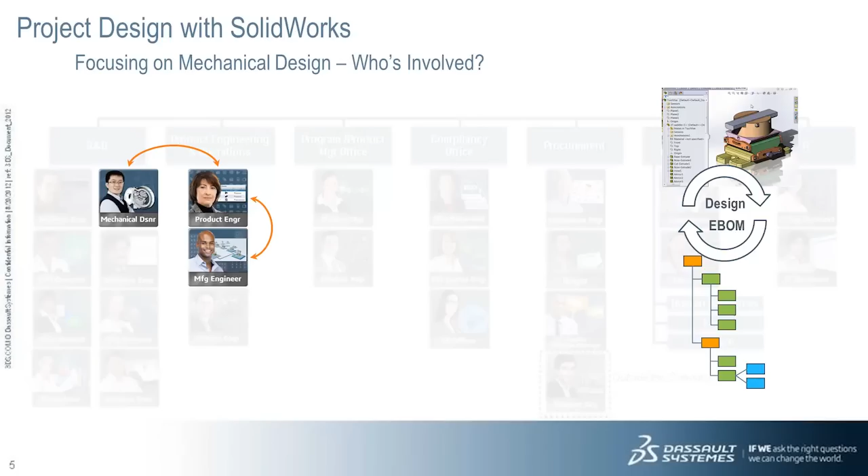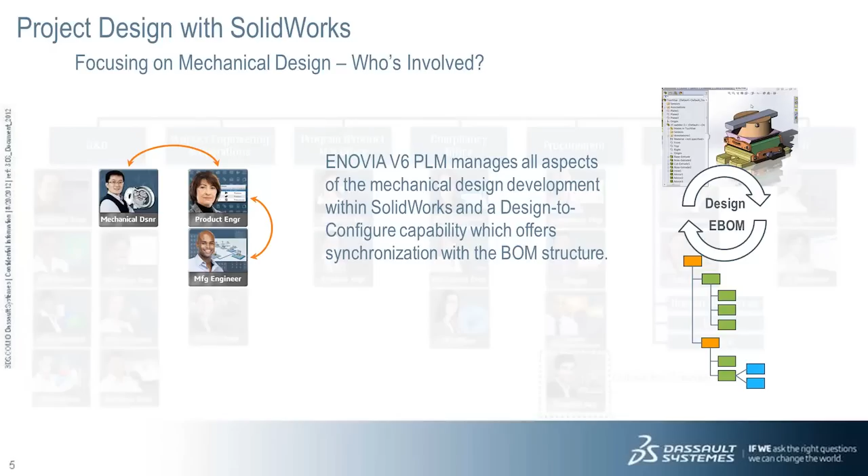ENOVIA V6 PLM manages all aspects of mechanical design development within Solidworks, with a design-to-configure capability offering synchronization with the BOM structure. This solution extends beyond the design department and reaches into engineering.

Including ENOVIA program management applications into this solution expands the number of user experiences even further. Program functionality allows us to make sure products are launched on time and on budget. Product and project managers plan and track project schedule, detailed tasks, and project deliverables.

From the project perspective, users have a difficult time finding project information because it is usually stored in multiple databases and on persons' desktops. Unpredictable results are also prevalent due to inconsistent processes and lack of deliverable templates.

Another problem is that there are often too many new product introduction failures. This is generally due to insufficient phase gate reviews and poor reuse of prior IP.

From the design perspective, there are three top issues that are commonly seen. The first is low engineering productivity, which is due to non-value-added data management work. In other words, the designer is burdened with more PLM activities than design activities.

The second issue is limited skill and knowledge sharing, generally due to a lack of communication processes within the enterprise. Difficult product development decisions round out the top three, generally due to a lack of proper product development analysis tools.

Subsequently, ENOVIA's project management capability can be used to drive the engineering and design efforts of the enterprise. Solidworks Management, or SLW, allows the designer and engineering groups to expose their IP into the PLM system, where they can then be linked to project folders and task deliverables as needed.

ENOVIA's Management of Office Applications, or MSF, allows the parallel management of Microsoft Office documentation, also commonly used in this environment.

Let's now take a brief look at the architecture of ENOVIA as it applies to these applications. The three client components that support the project design user experience all communicate through the IEF layer.

Designer Central is the repository for all Solidworks data. Below this, you have the ENOVIA Core, which communicates with the physical components of the ENOVIA PLM system, namely the index servers, main collaboration servers, and remote file servers.

Let's look at the value proposition of these applications. The ENOVIA Collaborative Design for Solidworks application offers an immersive and user-friendly interface to manage Solidworks design data within the ENOVIA PLM system. The primary values are the ability to maintain accurate representations of the intended design, improve design control management, reduce inaccurate data, and achieve ISO compliancy through standardized business processes and design standards management.

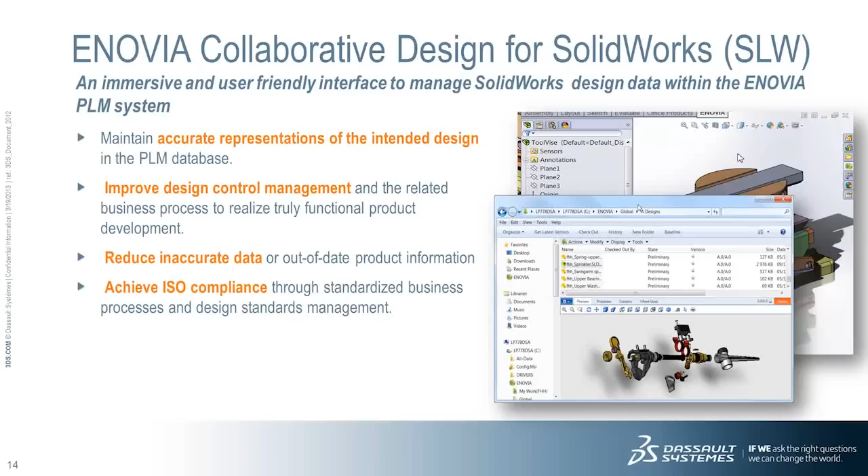ENOVIA Live Collaboration, which represents the core, offers a consistent and intuitive user interface for searching, managing, and navigating product data. It offers full text search capabilities to find, analyze, and refine vast volumes of product information. It also offers pre-built metrics reports to monitor and drive all business processes.

In support of Solidworks data management, collaborative workspaces are available for cross-functional and geographically dispersed teams.

ENOVIA Collaboration for Microsoft increases user PLM adoption by allowing users to work in their familiar Microsoft desktop environment to manage documents and other PLM data that relates to the design and engineering process. It offers improved enterprise collaboration by allowing users to easily share files across departments and geographies.

In addition, it drives standards by managing and sharing document templates in the PLM platform and records key product decisions by saving and retrieving email threads and attachments in the context of the affected product information. It also improves productivity by supporting the use of familiar Microsoft products to create and author data within the PLM system.

ENOVIA Program Central provides real-time access to project pipelines for rapid analysis and decision-making. It offers real-time reporting on all facets of the projects, as well as process templates with predefined phases, gates, and milestones. It also allows you to manage complex collaborative projects involving internal and external teams of prospects, customers, suppliers, and partners.

For this use case, we will look into the inception of a new design. Designers will review the tasks assigned to them via a project plan. As a project member, designers can browse and review data in the associated project folders to assist them in their work.

Let's now take a look at a short video that illustrates this area of the overall use case.

Let's take a look at how ENOVIA Collaborative Design for Solidworks, or SLW for short, can work in a project design environment. Here, in the Designer Central Power View, users can quickly browse all the workspaces and content that they are linked to via SLW.

Via the Task tab at the bottom, the user can quickly access any project plans that they may be assigned to as a resource. The project capability of Program Central allows the designer to quickly understand the overall project and how their tasks affect it.

From this high-level view of the project, the designer can expose the detailed project plan, also known as the work breakdown structure. The work breakdown structure exposes the specific details of each of the tasks assigned to the various resources in the project. A Gantt chart is also available to give the designer a quick understanding of the timeline and dependencies.

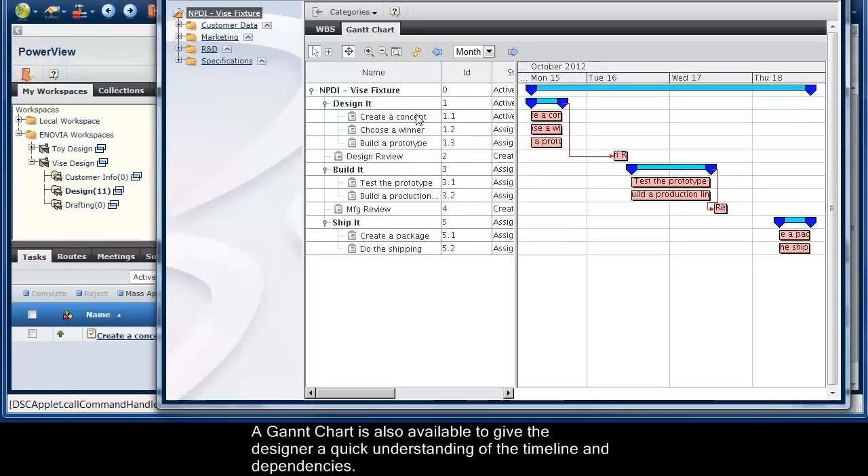Each project is also associated to a set of folders, similar to those used in the designer workspace. Here, the designer can review the documentation specifically related to this project for insight into their task or tasks. Viewing tools for both documentation, images, and drawings can be utilized from the web client. The designer's relationship to the project defines the type of access they have to IP in each of the project folders.

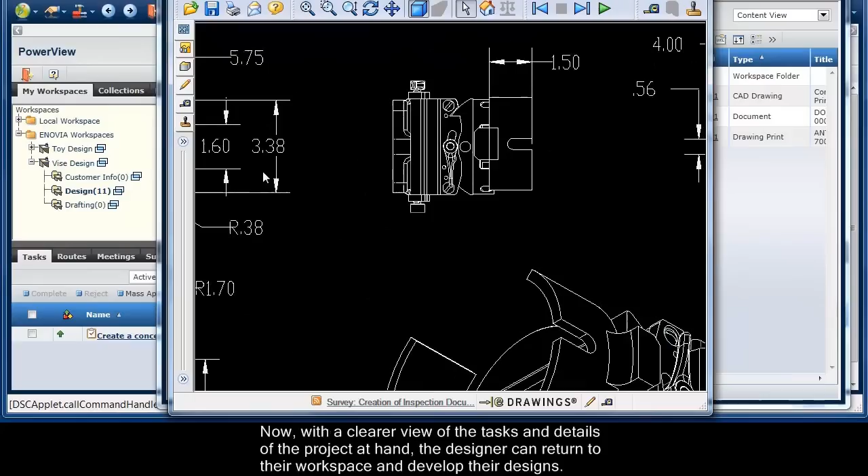Now, with a clearer view of the tasks and details of the project at hand, the designer can return to their workspace and develop their designs.

Now that the project has begun, let's focus in on the mechanical designer and their role in the process.

Designers share documentation with the overall product team, such as customer documentation and specifications. Within ENOVIA, designers can utilize the workspaces to collaborate and revise their designs within their design teams. As their designs progress, they can share their developed IP as specific task deliverables and general information via the project folders. ENOVIA Collaborative Design for SolidWorks allows the user direct access to all the PLM capabilities of the system. IP can be promoted and tracked within the context of the project to completion, with visibility to all project stakeholders.

Now that the designer has a clear picture of the related information and the task at hand, they can begin the design effort. ENOVIA enhances this effort by maintaining the familiar design environment within Solidworks. The PLM system supports the designer, as opposed to getting between them and the functions they need to complete their work. The PLM functionality is supplied through an immersive PLM interface, in that management functionality is only available when needed. To maintain effective design control, one version of the truth is available to all stakeholders.

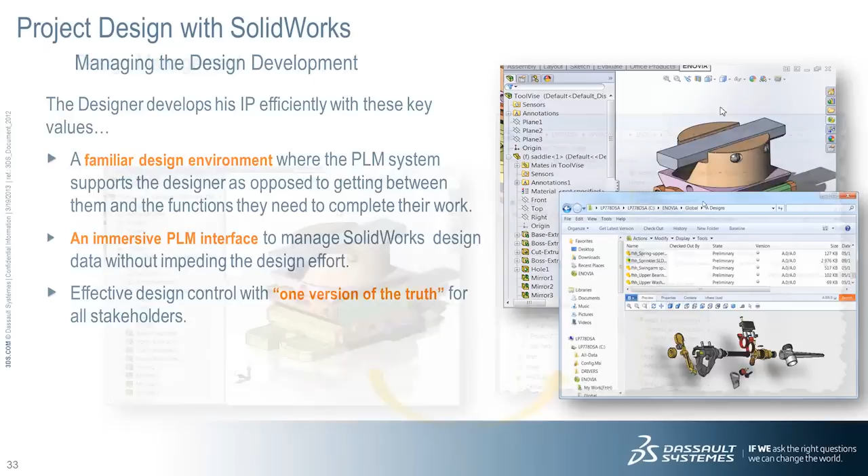Moving forward with our use case, the designer moves into the Solidworks environment. The designer will manage the IP created within this development effort in workspace folders independent of the project. This will allow the designer flexibility on when and what is released into the project. It should be noted that the designer may work with different users within the workspace than are authorized to the project itself.

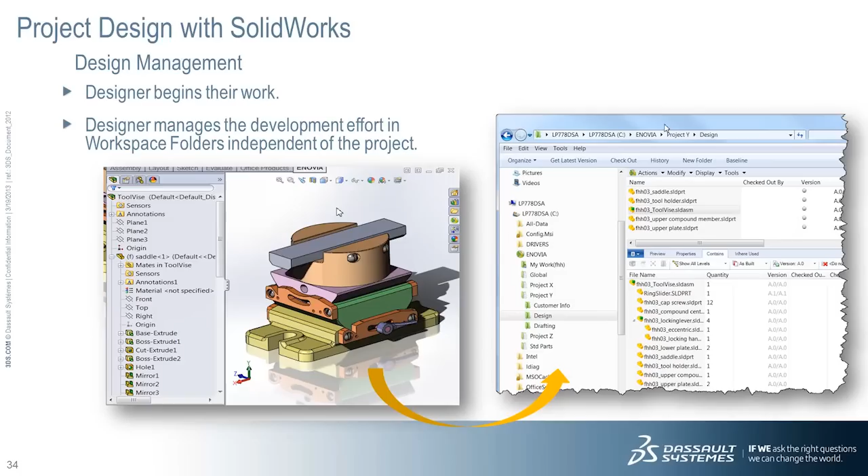Let's now take a look at a short video that illustrates this area of the overall use case.

From the desktop, designers can access the ENOVIA workspaces after authenticating themselves to the system. Once authenticated, the workspaces are exposed directly into the File Explorer for access, just like regular Windows folders. As you can see, the file-based paradigm is maintained, allowing instant familiarity for prior file-based users.

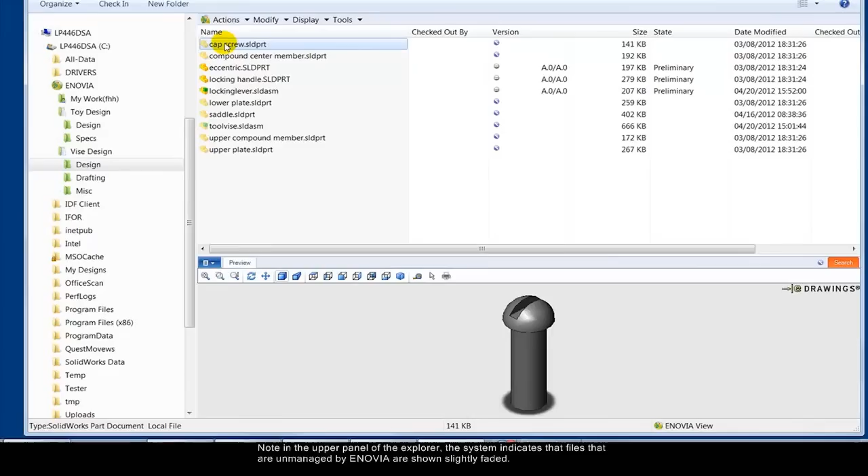Note, in the upper panel of the Explorer, the system indicates that files that are unmanaged by ENOVIA are shown slightly faded. Regardless of the state of the file, the designer can browse and utilize the viewer for sectioning, measurement, and exploded views of assemblies.

If the designer selects a SolidWorks component that is managed by ENOVIA, additional information is made available in the lower panel. The properties of the component, where it is used, and what components it may contain are visible. All this can be filtered based on the SolidWorks configuration.

The designer will now open a top-level assembly that contains some of the managed subcomponents. ENOVIA displays information about the current assembly in a dedicated tab to the right and a preview window just below it. Here, the designer selects a managed component, and we note the additional information in the preview window below. The attributes shown in the preview window can be user-configured.

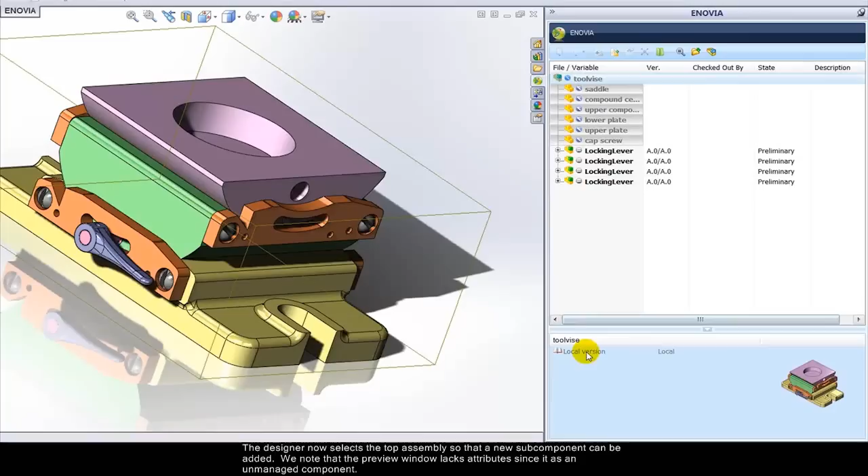The designer now selects the top assembly so that a new subcomponent can be added. We note that the preview window lacks attributes since it is an unmanaged component. The standard insert command is now utilized, which launches the File Explorer with the embedded ENOVIA workspaces. This will allow the user to insert managed or unmanaged components as needed.

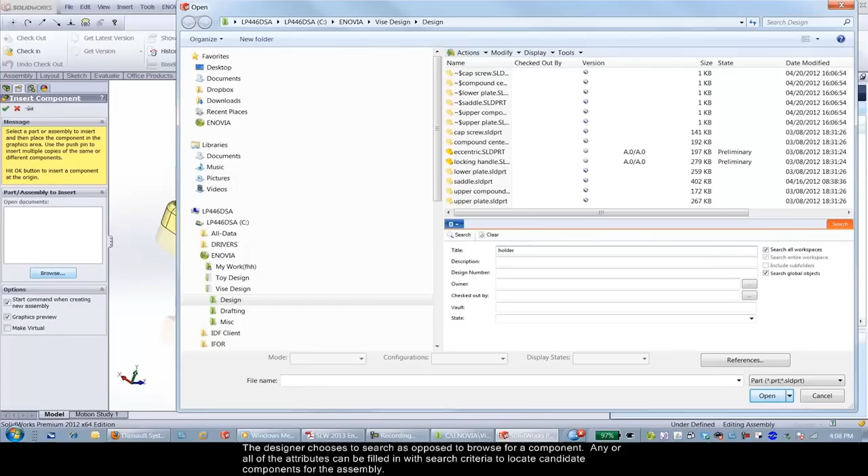The designer chooses to search as opposed to browse for a component. Any or all of the attributes can be filled in with search criteria to locate candidate components for the assembly. Once the criteria is complete, the search can be executed. Once a component is located, it is simply selected and placed in the assembly in the standard fashion.

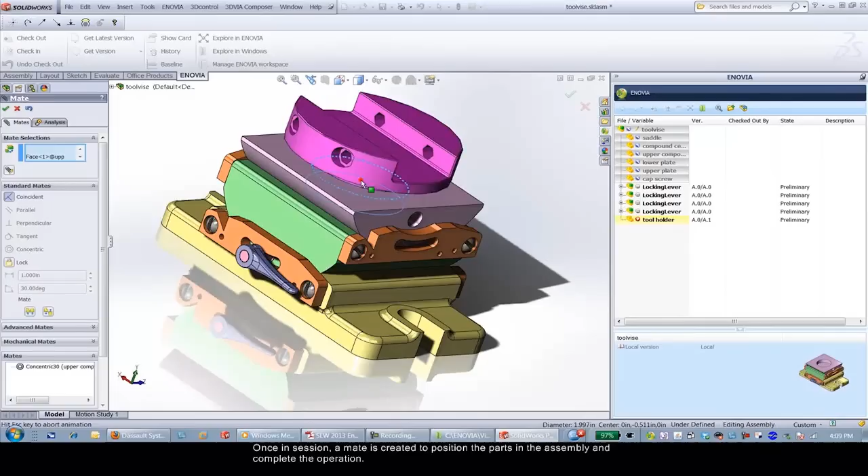Once in session, a mate is created to position the parts in the assembly and complete the operation. Once the assembly operation is completed, the ENOVIA tab updates, indicating to the designer that the newly added component on the local drive is older than the one on the server via color and symbol.

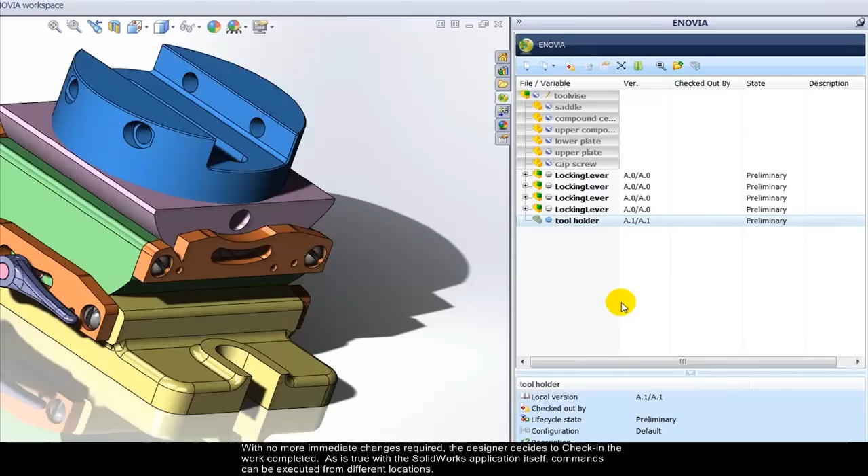To correct the problem, the designer simply right-clicks the component and chooses to get the latest version. The revision information and assembly display are updated accordingly. With no more immediate changes required, the designer decides to check in the work completed. As is true with the Solidworks application itself, commands can be executed from different locations.

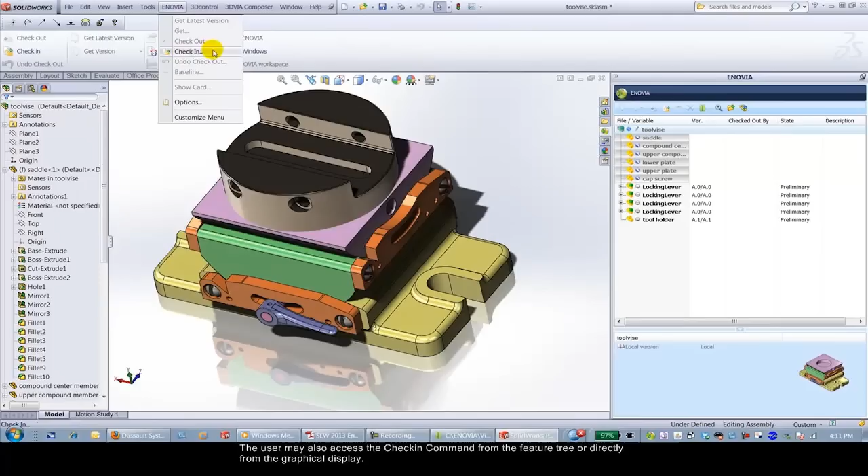The check-in command can be run from the ENOVIA panel, an icon in the panel, the command bar at the top of the screen, or the main ENOVIA pull-down menu. The user may also access the check-in command from the feature tree or directly from the graphical display.

Once the check-in operation is selected, a transaction screen is presented to allow the designer specific options. We note that the existing locking lever assembly is being ignored since it is already checked into the system.

Once executed, the updated components are uploaded to the server, and the local ENOVIA display is refreshed to reflect these changes. Once the design has been successfully checked in, all other designers with access to this workspace around the world can utilize it for their related activities and design work.

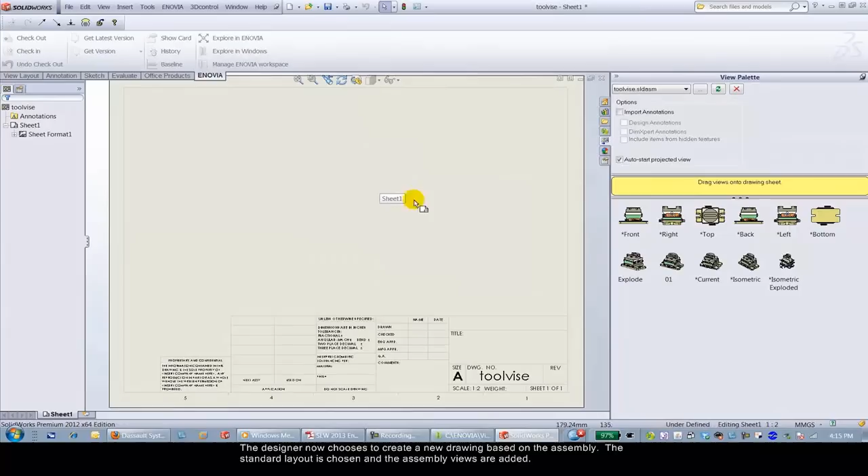The designer now chooses to create a new drawing based on the assembly. The standard layout is chosen, and the assembly views are added.

Once the drawing is completed, the designer attempts to check in the drawing to ENOVIA, but the command is grayed out. This is because the designer must first save the drawing inside or outside the workspace.

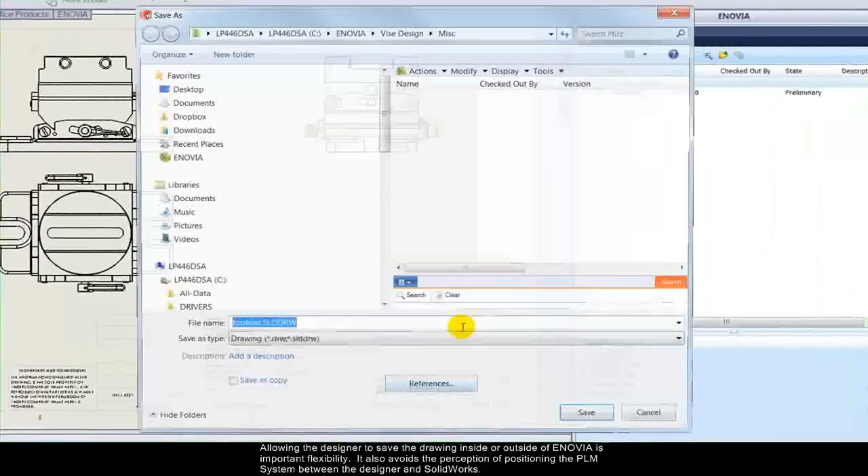Allowing the designer to save the drawing inside or outside of ENOVIA is important flexibility. It also avoids the perception of positioning the PLM system between the designer and Solidworks.

For this scenario, the designer decides to save the drawing within the workspace, thus allowing the drawing to be checked into ENOVIA.

Now that the check-in operation is selected, the transaction screen indicates that only the drawing will be checked in, since the underlying assembly was checked in during a prior operation.

With the drawing task completed, the designer now decides to make a change to the assembly. Once the drawing is closed, the designer checks out the assembly, which is still in session.

The tool holder will also be checked out during this operation, so that changes can be made to it in the context of this assembly.

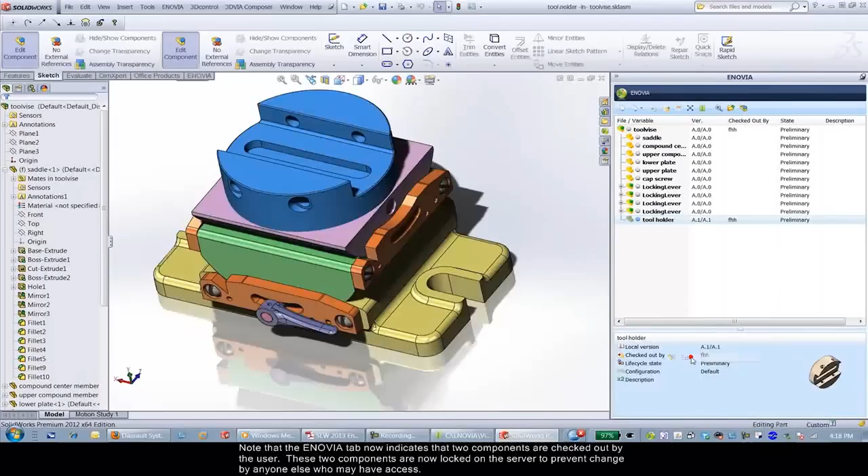Note that the ENOVIA tab now indicates that two components are checked out by the user. These two components are now locked on the server to prevent change by anyone else who may have access.

The designer can now safely make changes to the component in the context of the assembly. Note, however, that the other users in a collaborative design session may be working with prior revisions of these same components.

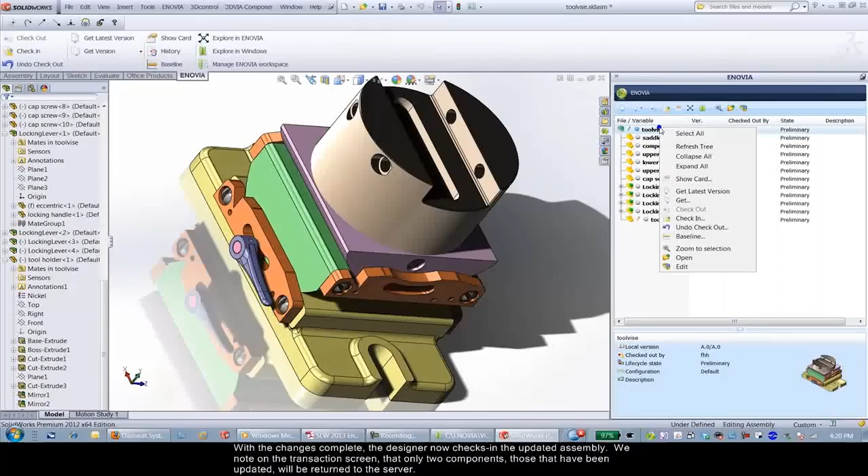With the changes complete, the designer now checks in the updated assembly. We note on the transaction screen that only two components, those that have been updated, will be returned to the server. We also can see that new versions of these components will be created, thus maintaining the history of the update.

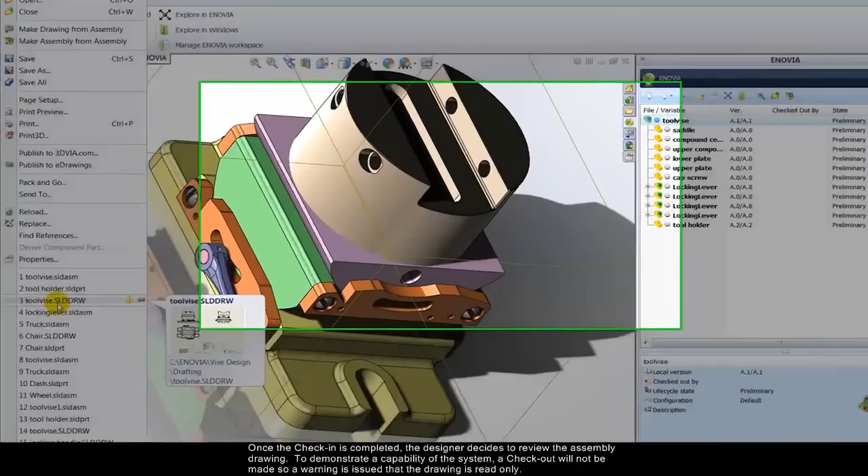Once the check-in is completed, the designer decides to review the assembly drawing. To demonstrate a capability of the system, a checkout will not be made, so a warning is issued that the drawing is read-only.

The ENOVIA tab indicates that the drawing has been edited by showing a pencil symbol next to the name. The update has occurred since the designer altered one of the components in the assembly.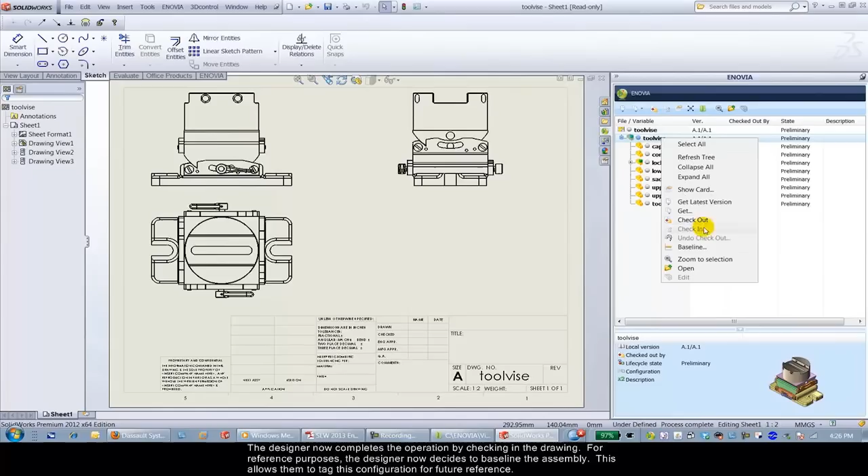On creation of the baseline, the designer may add a description to better define the purpose of this configuration of the design.

Subsequently, this specific configuration can be recalled and retrieved via the history command.

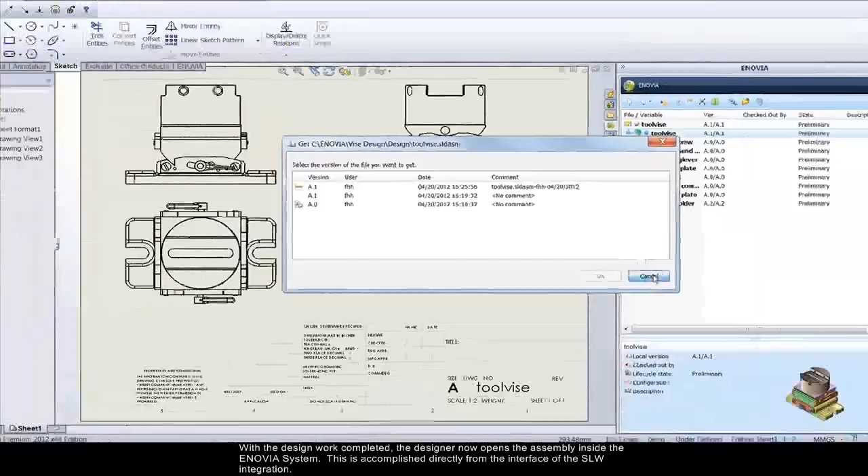With the design work completed, the designer now opens the assembly inside the ENOVIA system. This is accomplished directly from the interface of the SLW integration.

Within ENOVIA, we see the data that represents the file for the assembly component. Since Solidworks exposes the actual design as a configuration, the instance must be opened to access the structure.

The designer can now open a visual view of the assembly structure via the Navigator tab. All the objects defining this assembly are exposed. We can see that the baseline that was created in the client is noted here as well.

The system offers a viewer embedded within the web client to allow visual capability to the user community who may not have access to the particular CAD authoring tool that was used.

With the design structure selected, the designer can now generate an EBOM. This function will automatically create all the parts representing the CAD designs and create a link between the SW component and each part in the BOM.

Attributes can also be mapped to capture information directly from the design properties into the related parts. Once the process has completed, the system indicates that a part is now related to the component via an icon.

The designer can now access this part by following the link from the CAD component. Here, we can see all the part properties that define the components. These properties are defined from the CAD information, system defaults, or automation. ERP integration may also be used to assign certain values.

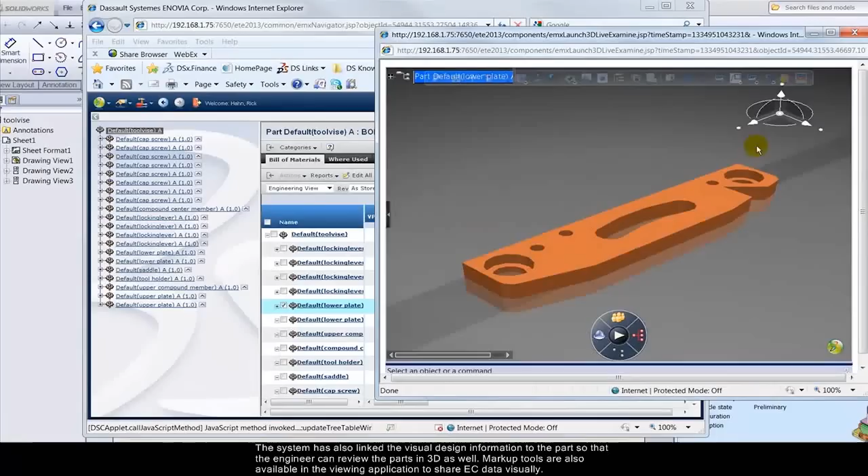From here, the designer can hand off the EBOM structure to the engineer via an EC to continue the BOM development process.

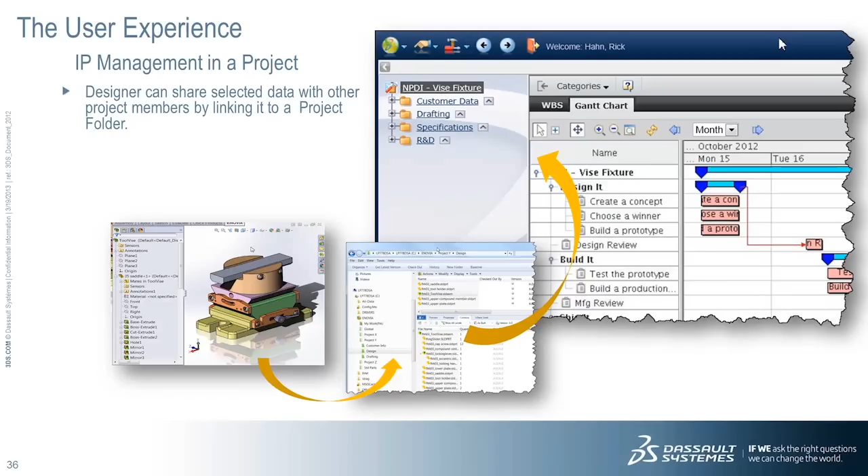Now that the designer has captured the primary design intent, the resulting IP can be exposed to the project team. Information that should be shared with the team as a whole can be organized into one of the project folders for the team to browse, as was done by the designer in the beginning. Information specific to a specific task can be explicitly linked to a task within the overall plan.

Let's look at a short video that illustrates this area of the overall use case.

Now that the design work is complete, the designer does a quick review of his design workspace to determine what components and documentation will be uploaded into the project.

Returning to the ENOVIA web client, the designer can review the workspace IP, which mirrors the information that was visible within the File Explorer. From the bottom of the screen, we can also see the task that initiated this design effort. The designer chooses the project itself to review the plan details.

Once in the plan, the project folders, which contain all the related project documentation, can be accessed. The designer decides to add an additional document.

The designer selects a document that was created during the design process. By adding the document to these folders, it will now be accessible to the other project members.

It is uploaded to the server via a wizard, which captures document details for subsequent access. The designer has been prompted for the physical file, and the upload completes.

The designer now accesses the task assigned to them. The system exposes the complete details and relationships this task has to the overall plan.

The next step is to link the task deliverables to the project that was developed in Solidworks. The designer chooses to link existing documentation, and the search screen is presented.